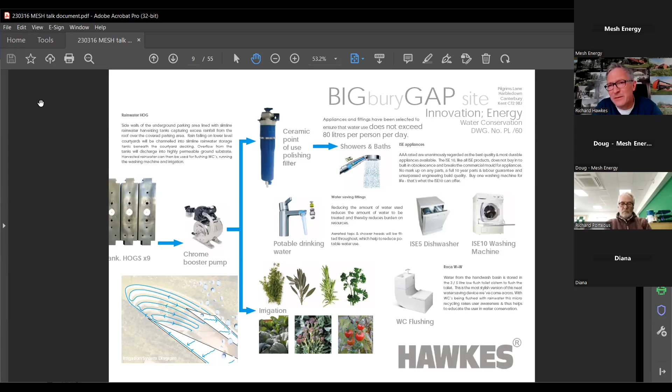The cost of doing it was going to be astronomical because it had never been done before, but you had to throw the kitchen sink at it to get to a level where a local authority felt the scheme was groundbreaking. And actually doing it is a very different thing, and whether it actually worked is another thing. But I use that as an example of one that, once upon a time, that was how we went about doing it.

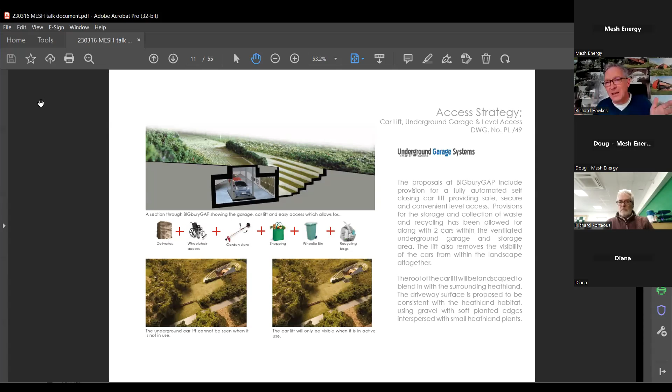Another thing in that house, we had a drive-on-board car lift. When we designed the house, you couldn't get one in the UK. There wasn't one legally enabling you to stay in the car whilst going up and down in a lift. You could get out of a car and have a car lift that worked like that, but back in 2011 there wasn't one. There wasn't the legislation that enabled you to sit in the car and go up and down, because it needed all the fail safes of a passenger lift.

Anyway, by the time we finished it and built it, there was one, and we ended up putting one in. It was an important part of planning for this scheme because we're in a scheduled ancient monument. We wanted to maintain openness of the skyline and views from the Pilgrim's Way over the house and site without the clutter of outbuildings and wheelie bins. So everything sits down in this basement garage, including wheelie bins, providing level access, everything can sit down there, your mother, everything. That was all part of the package really for this, but it did make things more challenging.

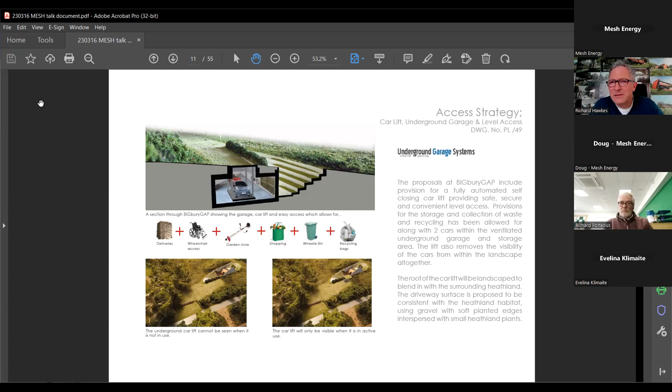Then in 2012, the National Planning Policy Framework comes in, the wording changed again. The word groundbreaking is then taken out, but the test is altered to say that a scheme needs to demonstrate itself to be truly outstanding or innovative.

This is really interesting wording because there seems to be the suggestion of a choice. I've always had a bit of an issue with this one, because if it's a choice, what if you choose to go one direction, or choose for it to be innovative rather than truly outstanding, forgetting the fact the next test in the policy requires you to demonstrate something reflecting the highest standards in architecture.

I've asked so many people, including QCs, to give me a definition of something that differentiates something that reflects the highest standards in architecture from why that wouldn't inherently be truly outstanding. Not had a proper answer to that one yet. So if I'm correct that you have to pass the high standard architecture test, which you must, and that is truly outstanding, then pure innovative becomes moot.

But the challenge I have, and we've had this discussion with many local planning authorities and inspectors over the years, is if you sought to, through a series of different houses, adapt and develop a series of technologies to a point where you get them working really, really well, why wouldn't you carry on using them? And you could be innovating through one project to another.

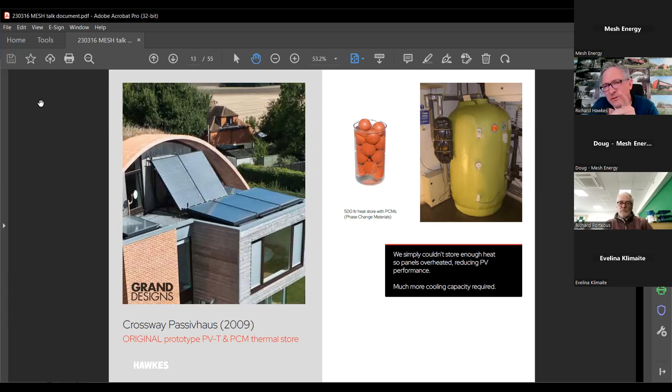So our phase change thermal store that we installed, which was a prototype, this is the one on the screen, is the second prototype, was great in terms of it could store a lot more thermal energy than a normal heat store could, but nowhere near enough. We subsequently, in 2014, changed that system to a fourth generation PVT, added a second heat store, just so we've adapted things over time.

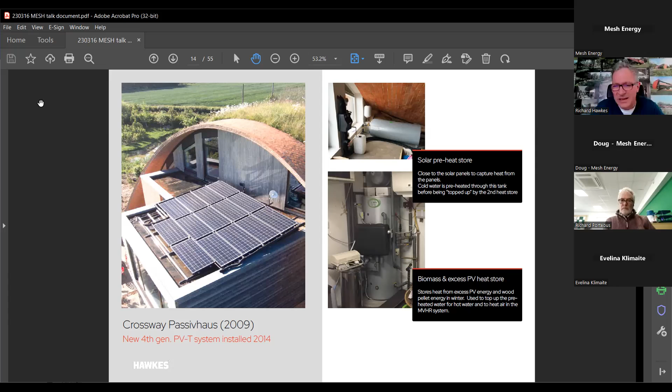But the next house we did, back in 2012, we thought, well, the better way to try and cool the panels will be - we need a bigger heat dump. So we put a slinky system in the garden, a second generation panel without the diffuser glass. So we're more on a kind of 1 thermal to 1 electrical, rather than 4 to 1, which was what our original prototypes were doing.

And then using a water to water heat pump, basically just take energy from the panels. So in the summer, the heat gets dumped into the garden, and then in the winter, we draw that heat out and serve the house heat demand. Worked really, really well. Much bigger heat sink. You're effectively getting to charge the ground up again, so it improves the COP on the heat pump.

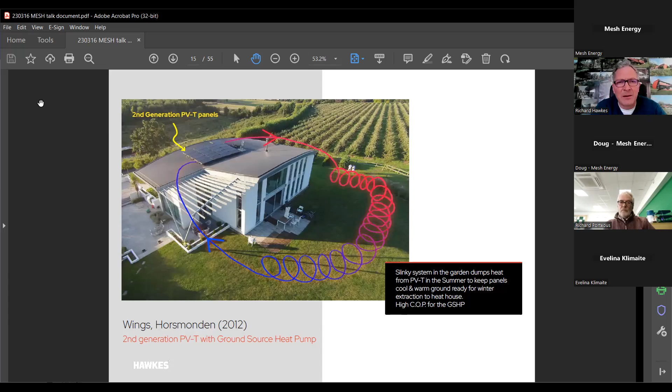After that, we thought, well, rather than having the slinky in the garden, why not put the slinky system under the house, use the house as a lid of a flask, insulate the inside edge of the strip footings, and create an earth energy bank, an interseasonal heat store. Works really well - we've seen sort of 16 degrees sway in temperature between summer and winter with this technology. It works really, really well, but it's complex and it's expensive to put in. I'll get into how that's relevant later.

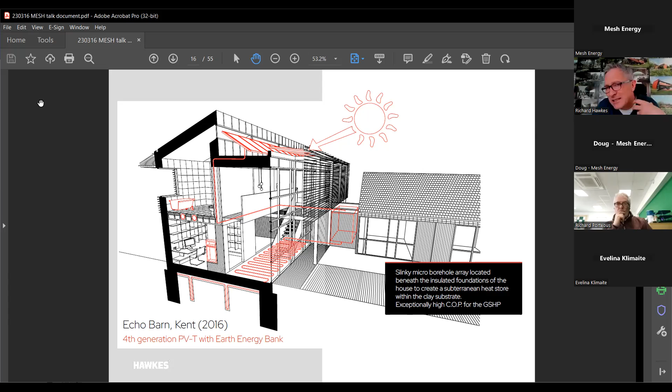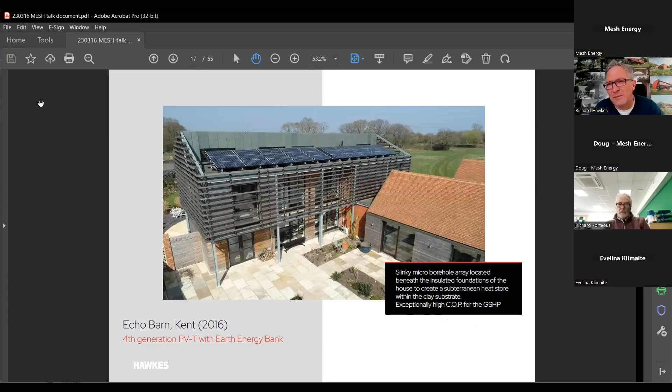But it works in certain instances where you've got the right substrate. This technology can work very, very well. This is that house - it's in Biddenden in Kent. It was given consent under paragraph 55, so an earlier version of this policy, but it was on a farmstead, surrounded by listed buildings. So it responded to the hierarchy of buildings on that farmstead, hence its form.

This was another project, the paragraph 55/80 project, in the Cotswolds AONB, outside Cheltenham, near Cheltenham Racecourse. This house used the same system as the last one, with an Earth Energy Bank.

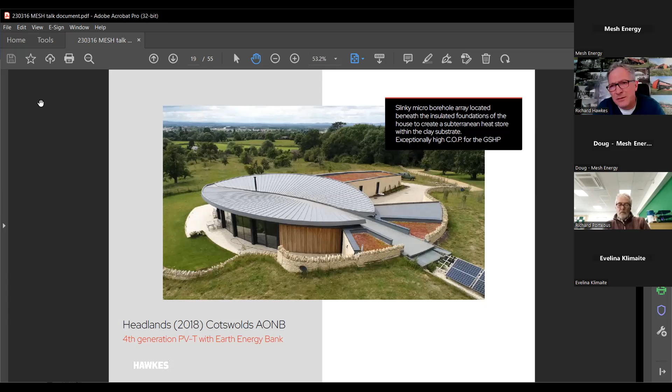The leaf-shaped roof was designed to actually extract heat and solar energy, much like a leaf, and dump that energy under the house. Same as before, we've got 50 odd boreholes under the house, about 1.5 meters deep. This is the house where we've measured a 16-degree sway in temperature between summer and winter.

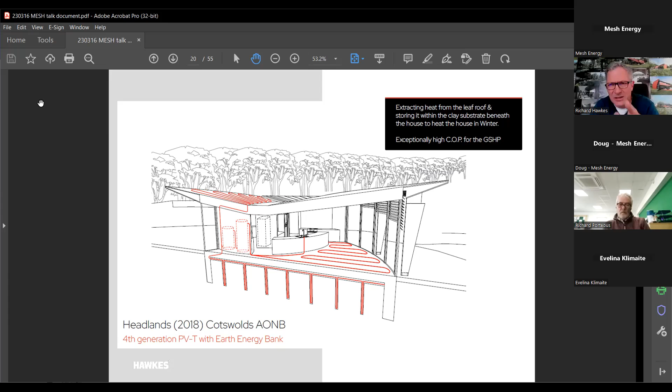Works really, really well. After we'd done those two houses, we got consent on appeal for The Leas at the top of the chalk cliffs. This house is in chalk, and chalk is an insulant, so we can't dump the thermal energy into chalk in the same way we can with clay. So the intention here was to dig a deeper borehole and dump the energy deeper down.

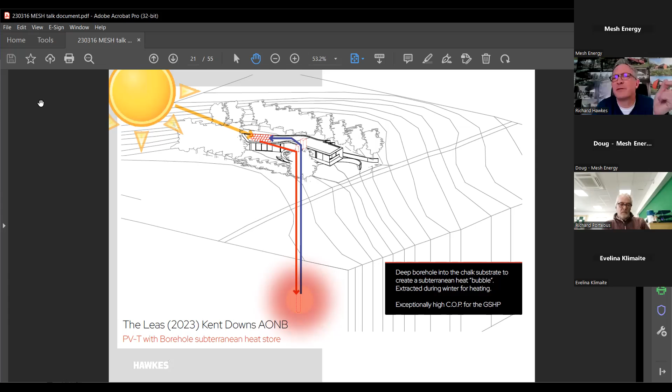By the time we got consent on appeal for this and actually started building it, we'd learned enough from the other houses to know that we could put the slinky system in the strip footings and use the chalk as an insulant to keep the heat in, using that as the heat store. But the council asked us to do lots of thermal modelling to prove our altered system would be at least as good as the original. That was going to cost lots of thousands of pounds to model properly both ways. So we said, sorry, we'll just do it the way we originally said.

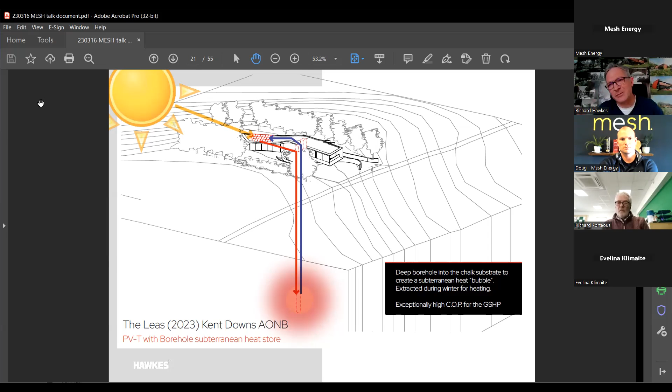The process there, the way they went about it, stopped us being able to carry on innovating, because they effectively held the scheme in aspic from where we got planning consent. So subsequently, we've worked with inspectors on a few schemes to write planning conditions that enable furthering of innovation between getting consent and actually building it, rather than holding things in aspic. It wouldn't make much sense, really.

This is that house. Not quite sure why I'm getting loads of white screens, whether I'm flicking past other slides or it's tricking me. This is that house - it's nearly finished now.

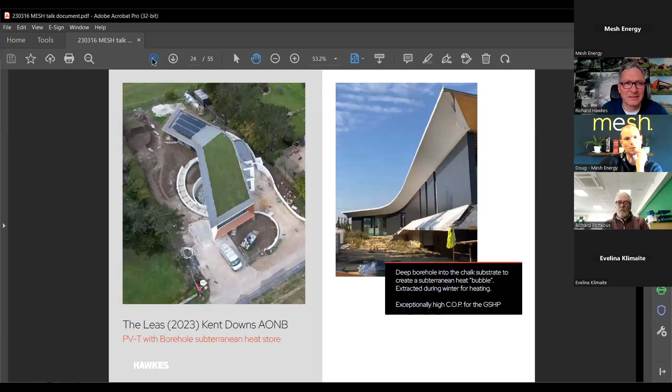There, with... you just seen a white screen? Yes, yep, we saw the houses you were talking about before. So you see that one. Just one, there's lots of blank screens showing up. That's a bit worrying, bear with me a second, let me just try that again. We believe you, the content's there, Richard. I honestly haven't got loads of blank pages, I might just reopen this again. Do apologise, bear with me. Talk amongst yourselves.

Although I did actually only finish the slides about 20 minutes past 11. Yeah, here we go, where are we? Ah, there we go, sorry about that. It's all right, we can edit this bit out, Richard, don't worry. What's that? It's now not wanting to load it. Help, it's not wanting to share that PDF screen now. Or is it not wanting to share the presentation? It's not wanting to share the...

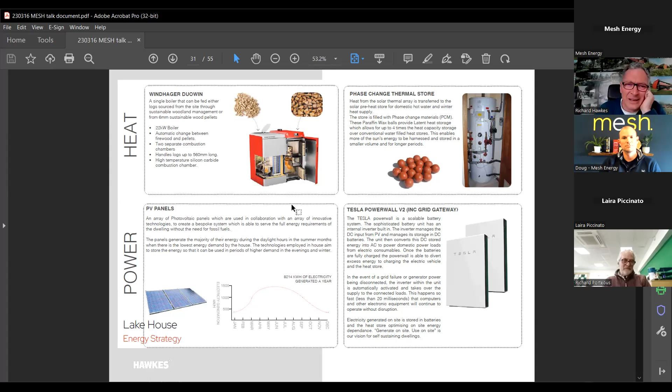There's nothing amazingly rocket science about that, but that client did send us a lovely message during the energy crisis this last winter, thanking us for making their house extraordinarily cheap to run and very efficient, because it's designed to be so.

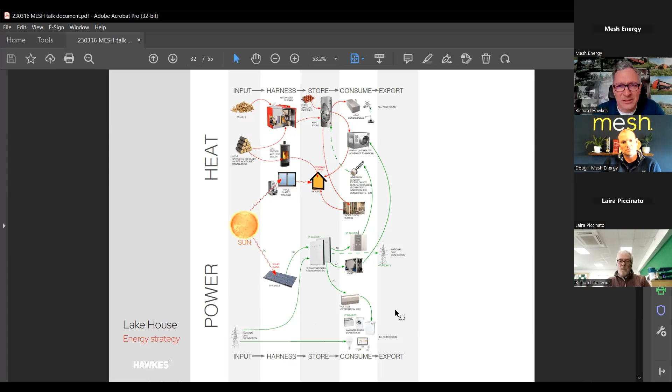So this house has got a log boiler with a pellet boiler bolted onto it, and a 13 kilowatt PV system. We've split the PV system into thirds, putting an inverter on each third, and then connected one Powerwall to one phase, because we've got 3-phase power here, along with a gateway on that same phase.

We've got two Eddi units on the other phases, just taking spare solar and converting that back into the heat store. Then, as the client understands how the battery is working for them and looks at different tariffs, they can bolt on another battery onto one of the other phases and keep things balanced that way.

There's nothing massively unusual, nothing groundbreaking, arguably nothing innovative about what we've just done with that house. But the inspector was quite clear in saying it's at least reflected high standards in architecture, and the performance of the building is higher than any house that's appeared on or been long or shortlisted for the House of the Year, which I'll get onto in a second to give it some context as to what reflects the higher standards in architecture. It's got a very technical component to that, as far as I'm concerned.

This piece of policy, paragraph 80, has been designed to be a hurdle, not an insurmountable prison fence. In our work, we quite often come across individuals or local authorities who have a perception that paragraph 80 sets such a high bar, one should never pass it.

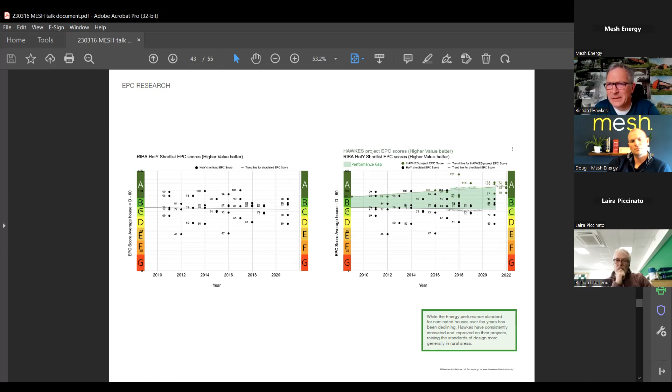On the right here you see this performance gap, if you like, between the average scores of all these shortlisted houses and the average score of our own projects, which do go on an upward trajectory over time as we learn how to do things better. And we will continue to do so.

EPCs aren't the greatest tool, but they won't tend to make a bad building look good. What we do, and have been doing for the last few years, is monitoring our buildings with our clients to go in and actually see how they are performing.

We're working with people like Doug and his team, and Richard Jack at Build Test Solutions, with his smart HTC monitoring that he's come up with through his development work — a really easy, really good way of being able to go to different buildings and measure apples and apples and apples from building to building.

Because we put a monitoring system in our house back in 2009, we were measuring apples while somebody else was measuring pears in their building, and somebody else oranges in theirs. It was very difficult, even though people were monitoring stuff, to compare data — user influence, weather, climate, all that data wasn't able to be made to align. Whereas what they've been doing at Build Test Solutions is creating a system that can enable apples and apples and apples from building to building, measured at different times and different periods.

Richard Jack's also got a very cool thing he's doing where you connect a FLIR One Pro thermal imaging camera to a phone. There's a clever piece of software that enables you to do live measuring of U values. This is him setting it up in the corner of my house. My tiled arch does have some cold bridging through the side of it where I've got a thermal break in the arch, and I always knew I'd have a cold bridge where the arch meets the foundations. Then you can see that cold bridge in the U value there.

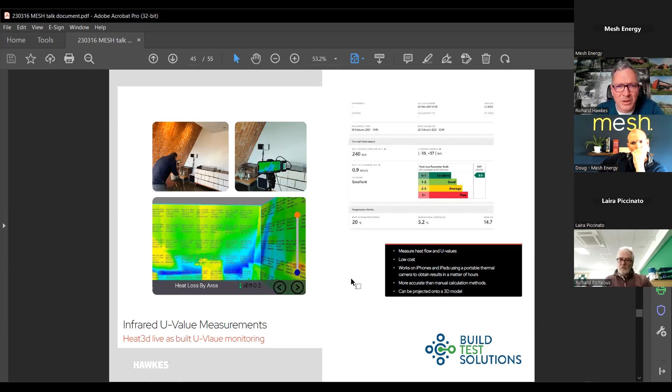So this year, with the work we did to engage with the architects longlisted for House of the Year, one of the practices and the client that was very much on board with doing this monitoring and wanting to understand how their building worked and enhance their understanding was the winner.

David Kohn Architects and the project architect Jennifer Dine, and Edward the client, have invited us in with Richard Jack to start doing some monitoring.

This house actually achieved a C rating with a score of 73, and the client gets drafts down the middle of his house because he runs his log burner quite a bit. Then you find out he's put air bricks in, and the air tightness rating of 5 isn't that good. There's no ducted fresh air supply to the wood burner, and no understanding of how to manage air quality.

He said at the RIBA, when they did a talk there, 'we didn't want to live in a stuffy passive house.' Now I know lots of people here will be going, what? His perception of what a passive house was wasn't quite right.

So we're trying to educate, and part of what we're doing in this work is to help raise the standards of design more generally, which is one of the tests of paragraph 80. So here we are actually helping them.

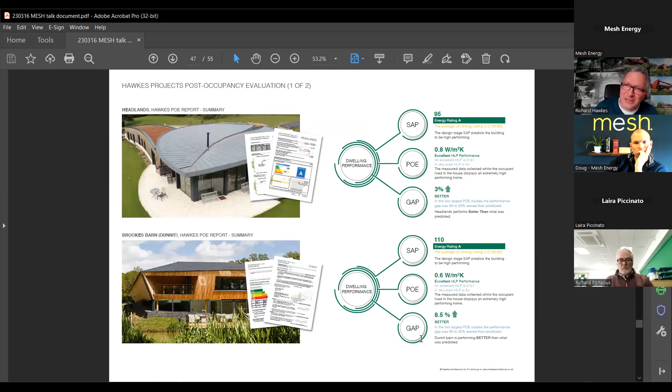When we get this data back, we do analysis and comparison so clients can understand what it is they bought and how it's working. Then we analyze that against the performance we actually set. We are seeing a performance gap, but I'm pleased to say on our buildings we're seeing performance gaps that are better than what we'd stated, which is rather good. We're going into all our buildings and doing that.

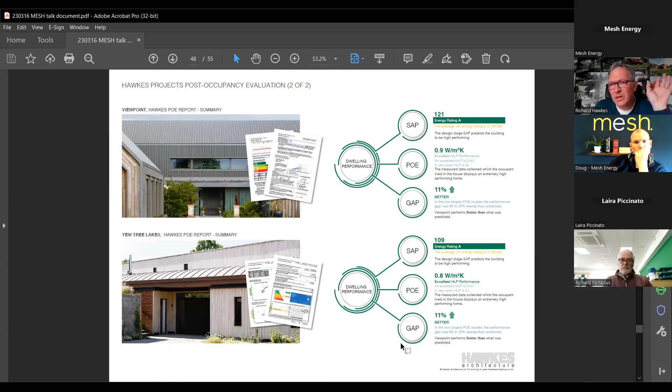And so it's a viewpoint lake. Yeah, the lake house monitoring we did last year was showing it performing 11% better than we expected, which is great. We're lucky in the sense that because we have to deliver paragraph 80, clients can't argue with the fact we have to deliver a very airtight, very high performance building. So that's what we do.

Going back to innovation and paragraph 80, it comes up a lot that whoever you speak to, this technology we developed using PVT and Earth Energy Bank is something we've developed to a point it works really well, but it won't work well everywhere - it won't be the right solution everywhere. Lots of people will talk to me about using heat pumps, air source heat pumps, ground source heat pumps.

In recent years we've found it quite interesting looking at things like long wave infrared. We've been using biomass for years. We will never use an oil or gas boiler, but we're quite interested to understand how one might be able to compare all of these things on any given property. Of course, size and efficiency - the number of kilowatt hours per metre squared per annum - will make a big difference as to what the appropriate solution might be.

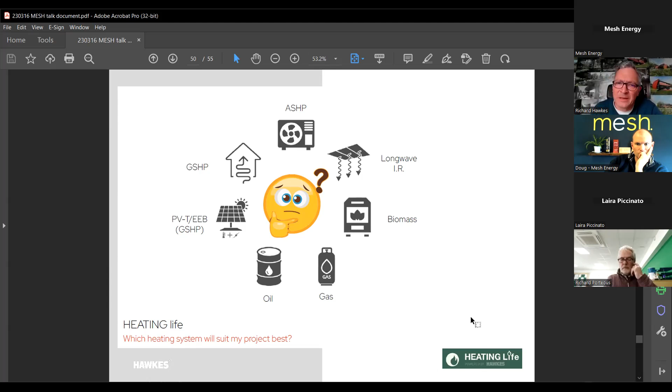So we've started to develop a piece of software that enables a lay user or a professional to determine this by putting in certain parameters. A lay person who doesn't know anything about buildings might just click a preset 3-bedroom house, for example, and it will show them typically what a 3-bedroom house energy profile looks like and what an appropriate technology might be to run their house, depending on how efficient it is.

If you've got a really energy hungry house that's quite large, certain technologies aren't going to be appropriate - one will be more appropriate than another. But whoever we spoke to seemed to have a pet technology, and I wasn't seeing much impartial balancing of understanding of different technologies. Because we know there'll be scales - if you're on a coast with a large house with high heat demand, your air source heat pump might corrode quicker than if it's inland.

So the lifespan of the heat pump will be challenged - can we model that? Well, yes we can. Can we look at what the maintenance costs are? Can we look at what the installation costs of different systems might be relative to the size of the building? So we've basically been developing a piece of software that enables all this stuff to happen. This is a crude version of the first output. Doug will recognize these because he was with me when we first talked about it at Grand Designs Live last year.

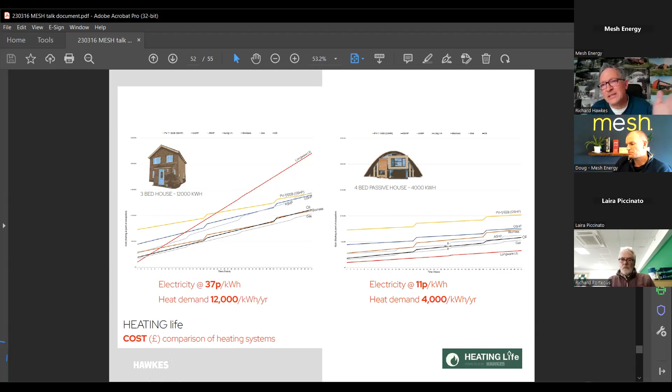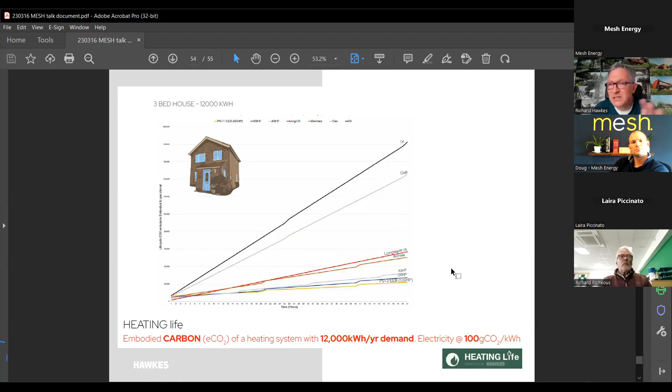So this tool is something we're developing to help us make informed decisions. Oh, that's the last slide.

Oh wow, you sound surprised I've gone through that quicker than I thought I was going to, Richard. That was good timing, because it allows some time for questions. We've got thanks for that, by the way, and we've got a couple of questions. Anybody who's been thinking about some questions, do get smashing away on the comments section to get those in. I'm sure you're happy, Richard, for everybody to throw whatever questions they deem appropriate at you.

I see Rebecca asked the question that I then covered. She asked it at 12:20 and I then covered it.

There you go. So let's talk about the one from Stephen. He was asking, have you ever used earth tubes on any of your projects, and if so, were they successful? Preheating MVHR incoming air, I think that's what Stephen means - is that right, Stephen? Kind of these long tubes that you tend to get on the continent, where you draw air in and it cools it down or warms it up.

I actually, the day before I poured the slab for my own house, was going to be doing that, and I just - because it hadn't been done and it was difficult enough finding an MVHR unit at that time - I bottled out because I'd read something that talked about, well, if you're bringing fresh air in past a tube that's got heat around it, there was a possibility of bacterial growth on the inside of the pipe. And I got the jitters and I bottled out.